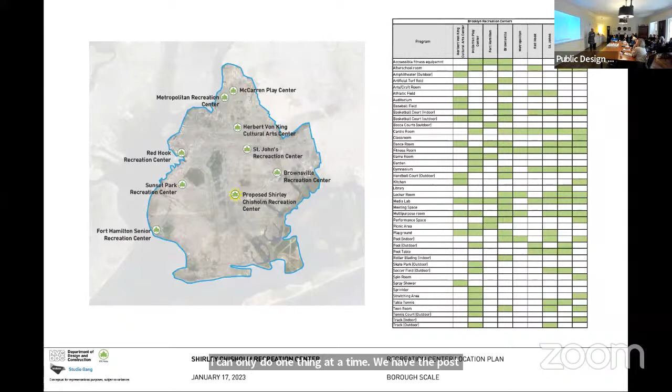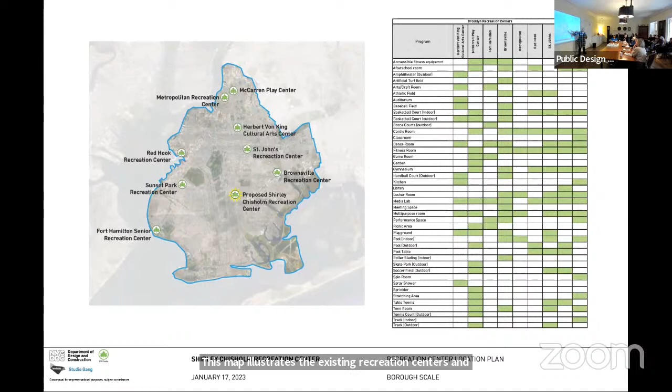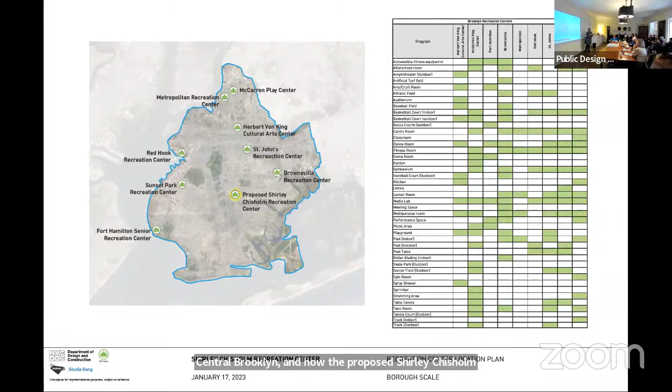This is an amazingly important project for Central Brooklyn. This map illustrates the existing recreation centers and the sort of recreation center desert that we have in Central Brooklyn, and how the proposed Shirley Chisholm Recreation Center will be a major magnet for community health, recreation, wellness, equity, diversity, inclusion, all of the goals that we want to meet with this project.

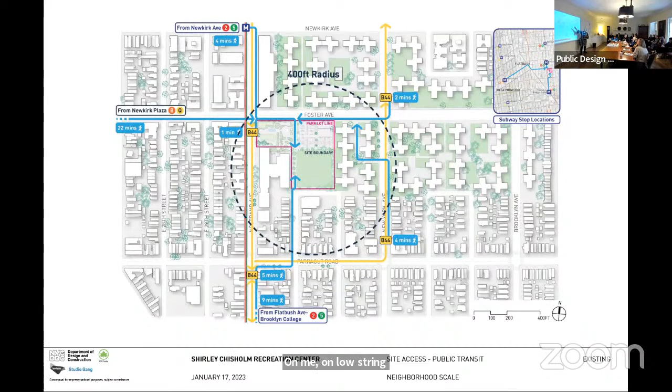It is situated centrally adjacent to what used to be known as the Vanderveer, now the Flatbush Gardens, or a site adjacent to a public school on Nostrand Avenue, which is a major thoroughfare on Foster. And already you can see the influence that will have on the immediate community and the use of open space there.

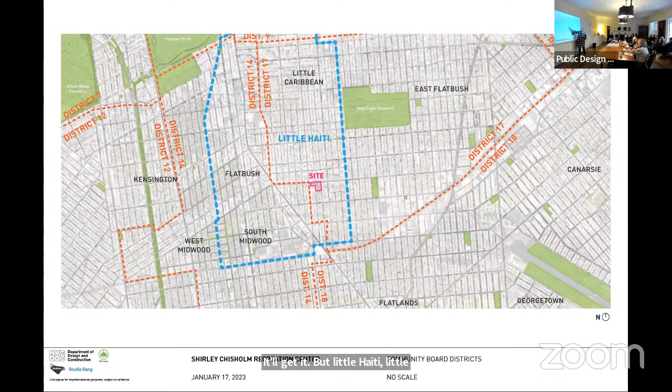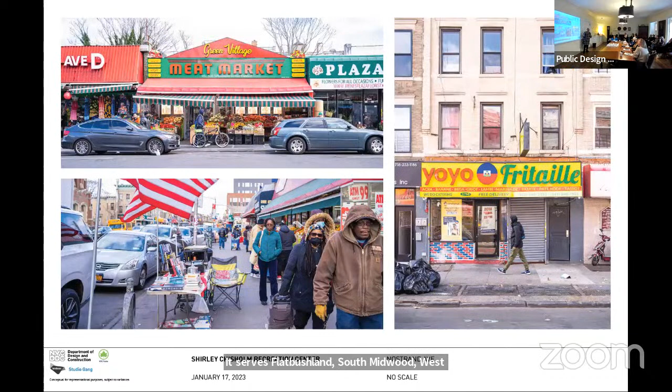It abuts Little Haiti, Little Caribbean. It serves Flatbush, Flatlands, South Midwood, West Midwood, East Flatbush. And within a rich community, an active, vibrant community, it also proposes to expand on that community life. A community that is, in fact, reinventing itself as we speak.

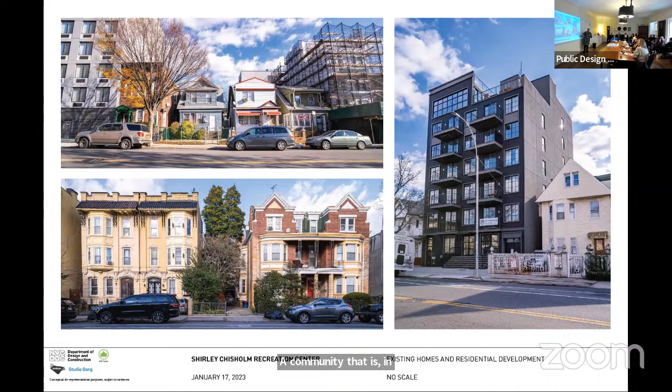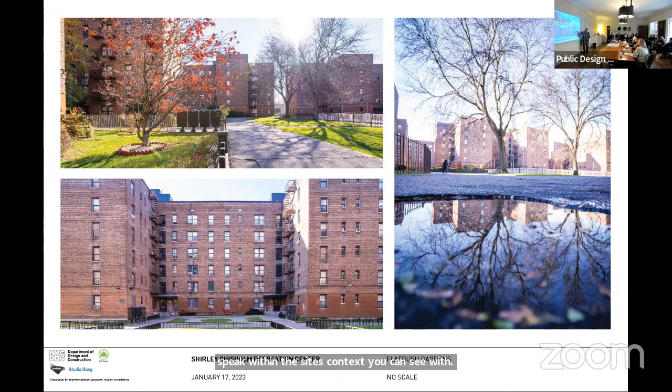Within the site's context, you can see within the Foster houses, the immediate context of the site, its openness, its flatness, its relative embrace with the existing architecture. And within the existing Nostrand playground, you can see how a former baseball and probably mini soccer field can be reimagined for a structure that completes this urban design.

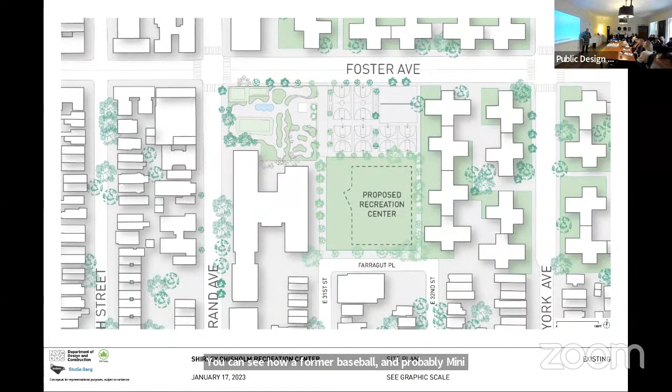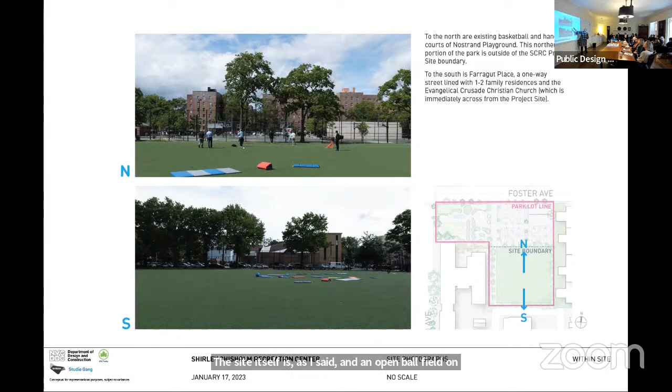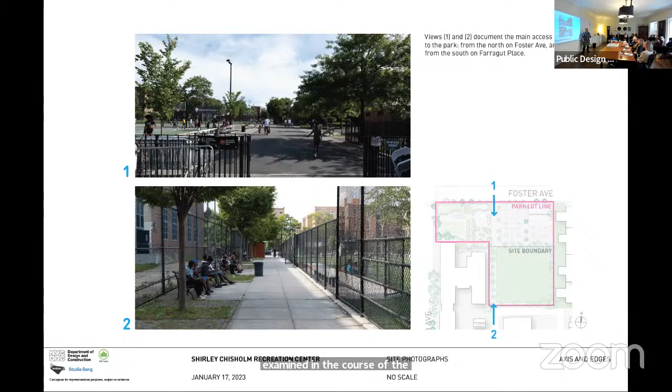The site itself is, as I said, an open ball field on a relatively flat site with clear sight lines through, fronting the school. One of its significant features that will be examined in the course of the design is actually the amount of enclosure, including fences everywhere on the site. Again, even with its adjacent neighboring, how the boundaries are defined are really critical to this project.

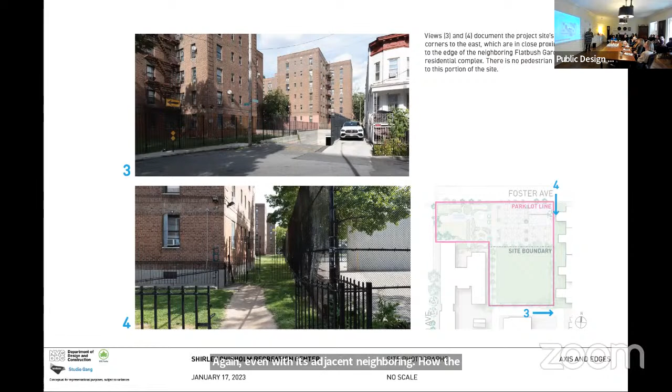We wanted to make sure that in delivering this project, that we weren't paying lip service to Shirley Chisholm, but actually making sure that the principles for which she stood and the aims that she had for representing the African-American, Afro-Caribbean community and Caribbean community in Congress and as a presidential candidate, that these were the basis of the principles by which we approached the design.

I think this is working. So, thank you, Elizabeth. My name is Wes Walker, designer of the Studio Gang team. We are architects of the project, a great team, and also very excited to share with you today the concept for the architecture that's situated within the context that Elizabeth just described.

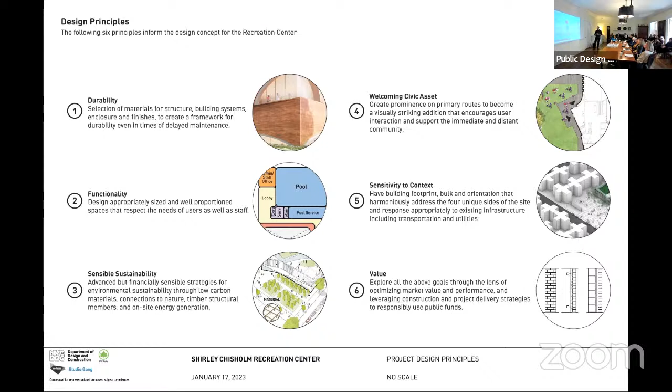So, working on a building in the New York City Park that's really meant to become a kind of welcoming community hub, we laid out a series of principles around durability, functionality, sensible sustainability, and zeroing in on the opportunity for this building to become really a very welcoming civic asset set within this park landscape that's able to negotiate a varied context of housing, of school adjacent, of the park itself, and the different characters of the streets adjacent, and looking for the ways that we can design this to be assembled and constructed in a way that brings the best value to the public we're going to serve.

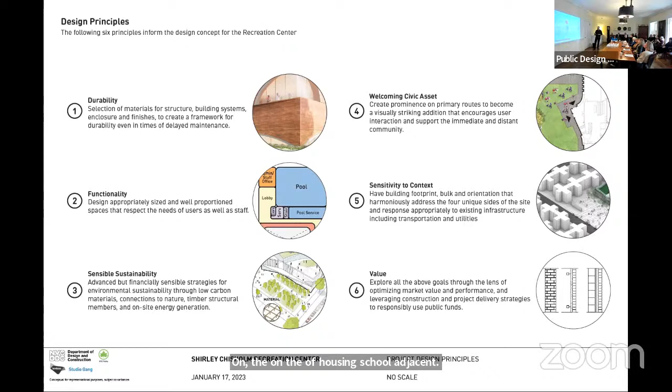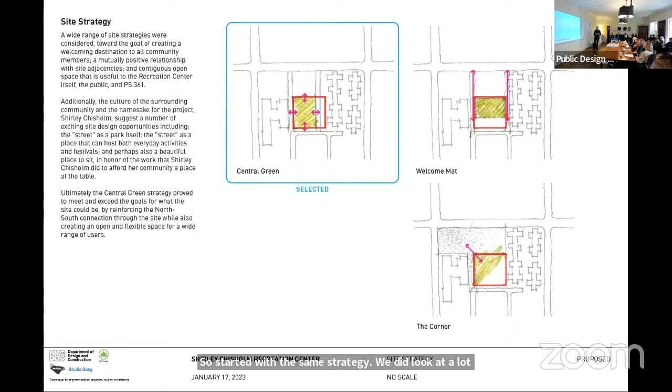Starting with the site strategy, we looked at a lot of different footprint approaches and ways of situating this building in the park. A big question is what's the front of this building?

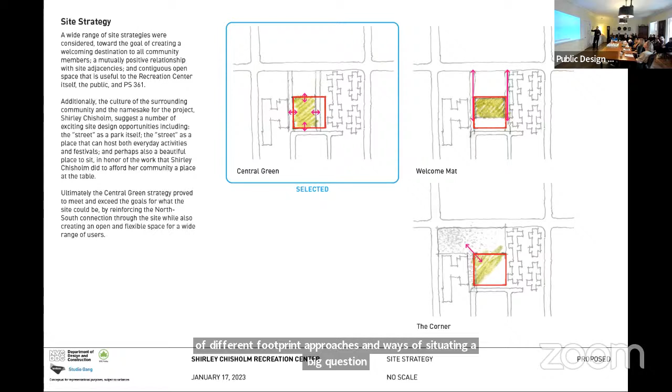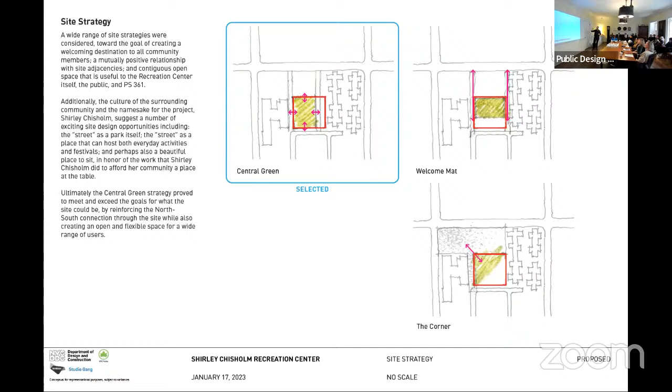It's a mid-block site situated within this park. These different sketches from early in the process look at which way the building should address as its primary front. We came to this central green notion where the building could face all of these directions with some manipulations to the form.

Programmatically, we looked at L shapes and a courtyard building, but we landed on getting the most compact footprint possible, because that preserves as much parkland as we can, and the sense of porosity and openness to the block, which is key for inviting public space and also for security reasons with sightlines.

The program is organized around the two primary spaces of the building, the large pool space and a large gym space. Those are essentially side by side with a spine of support programs in the center that allow for easy access and use of those primary spaces.

The gym is sunken one story below, same level as the tunnel and support space beyond the pool. That's a double height space. On level 1, ground level, we have the track above the gym. The track is at ground level, and the pool is at ground level, which is also a double height space.

Moving upstairs, fitness programs are concentrated on level 2: strength, cardio, spin, locker rooms, and the dance area, adjacent to the upper portion of the pool. On top of the building, we have educational programs largely geared toward youth, giving them secure outdoor space where they can take more ownership of it.

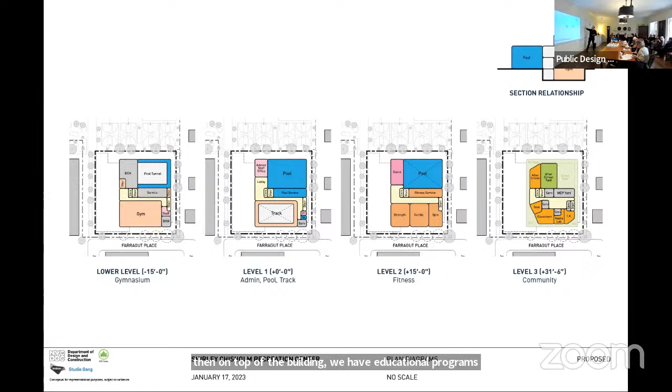Here's a cartoony section diagram of how this works. The gym double height sits one floor below, and the pool double height sits up above. Level 3 is a partial level.

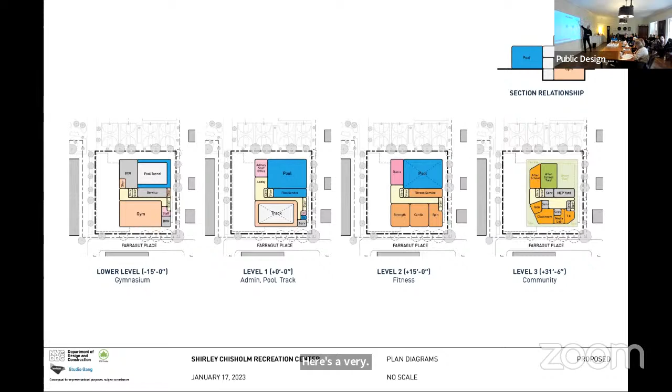These are program diagrams just rehashing what I just said, so I'll move through these quickly.

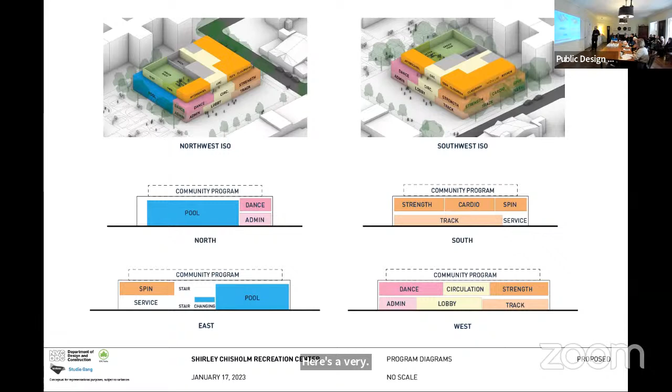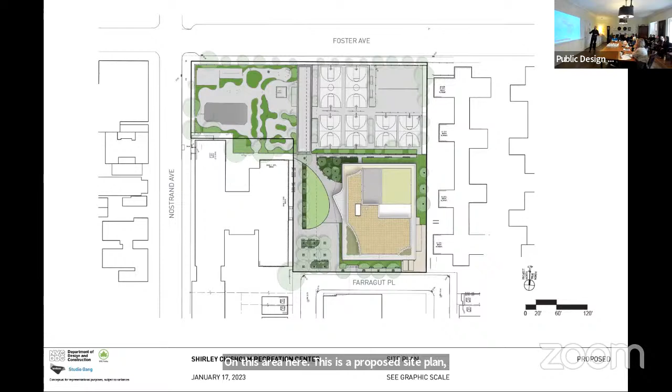I'll hand it back to Elizabeth to describe more about the landscape design. Just a quick introduction to the site plan. Our building is compactly situated on this turf area, and this is a proposed site plan and roof line survey, which we'll come back to in more detail.

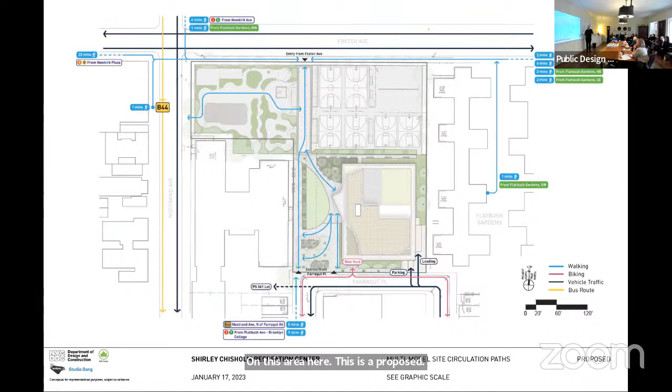Circulation key through the block. Again, this building addresses multiple fronts, so this move in plan peels out the entry so folks can see it from both the south area, where we have vehicular drop-offs, bike rack, and pedestrian access, and also from the north side from Foster Avenue.

We anticipate more folks coming from the north on foot. Most transit connections come from the north, as well as all the activity from the playground and sports area. So the building plan form works to address those two approaches.

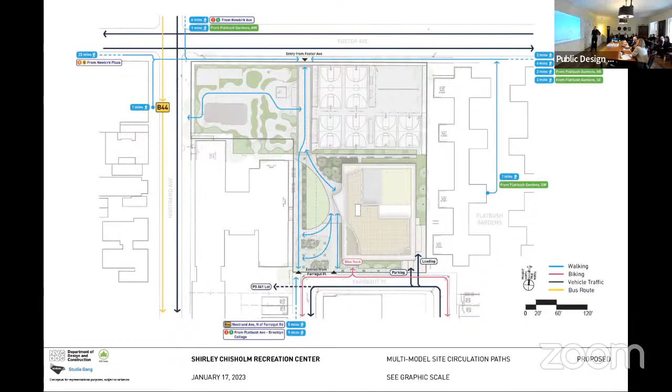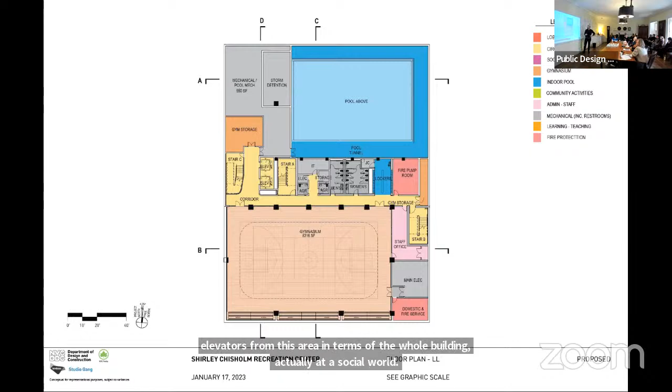We feel like this is a very user-friendly building in the sense that it's quite simple to navigate, but there's a lot happening inside of it.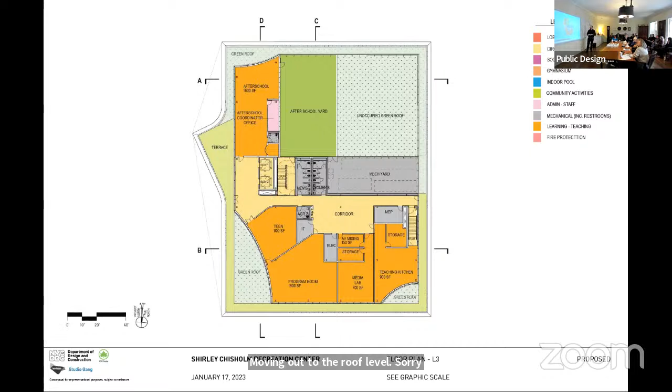Moving up to the roof level, the third level. This is where we have spaces for a teaching kitchen, media, and programming for teens and younger kids, providing a secure roof space for youth that's safely enclosed within a fence that still allows some transparency and views out.

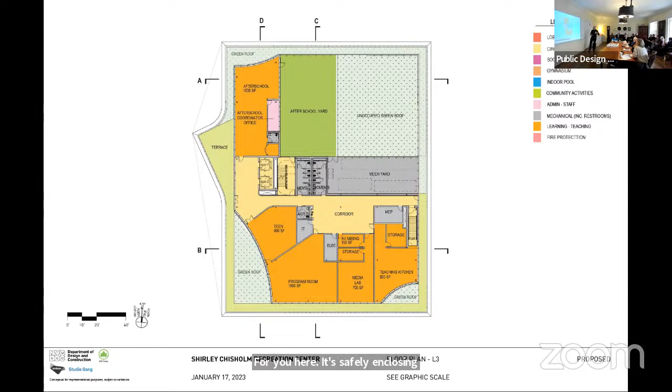This whole level is set back from the edges, with a setback and slightly different materiality to give the building a sense of lower proportion, which we felt was more appropriate for connecting it to the scale of its size. The green roof on top meets the environmental requirements for the project and helps a lot with our water management strategy.

And I'll hand it back to Elizabeth now to discuss. We're in the process of advancing the site development concept in such a way that the original parti and ideas are melding with New York City Park standards, so there are aspects of the design that are in progress.

I'll start with this lower corner. In recent updates, we're studying how use of the service court can be addressed so that we can preserve the full line of existing trees here and maintain the buffer with the residents.

The area along Farragut Place is being refined so that there's more of a defined drop-off. We have fire access challenges, and we're looking to make the site more efficient so that we can consolidate areas of impermeability and permeability to better address landscape needs, planting needs, and stormwater management needs. So there will be an anticipated change within this area.

However, the main program elements we have here are going to be further refined. We're in discussion with Parks about creating more of a direct entry and link to the school, and how this changes the configuration, maintaining the throughput all the way from Foster down to Farragut.

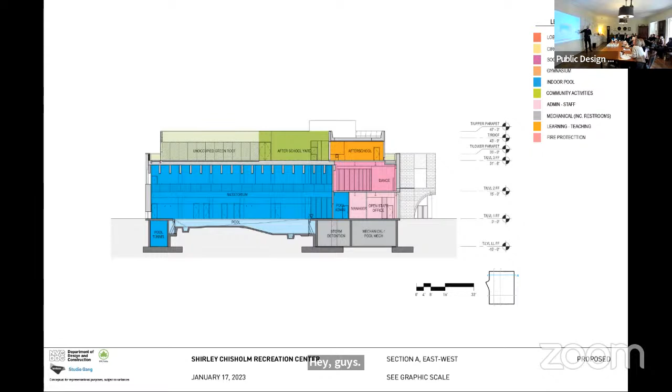I think we'll wrap up quickly here. I'll fly through these sections. This is a section cut through the pool. You can see how the pool is interacting with the below-grade excavation and basement spaces, and these nice sculptural beams spanning across the pool.

Then coming through the gymnasium, where we can see the sunken gymnasium with the running track above it and provision for the beams as well as the basketball and ceiling-mounted elements, cardio strength above.

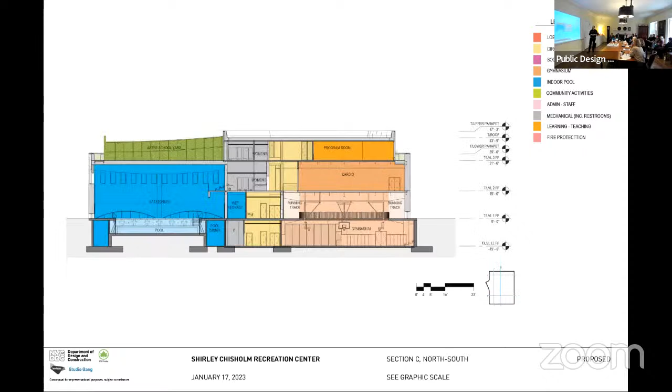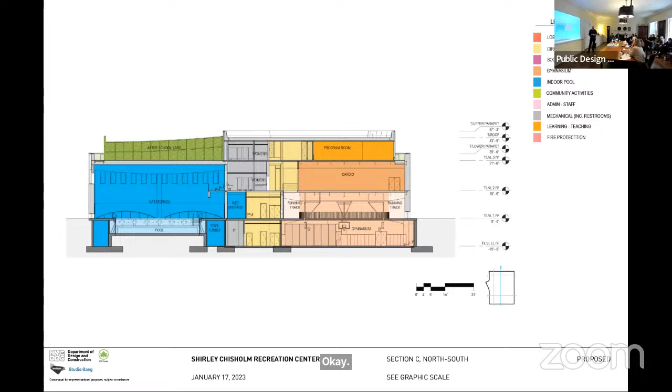Here we're cutting through both the pool and the gymnasium, and you can see the after-school space is set back on top of the building. So we have a building that feels like a two-story building, appears like a two-story building from many views, but it's actually three stories.

Let's see, we're cutting through here - a north-south plane just past the east facade, or the west facade, of the building. And a few notes about our material approach and fenestration approach to the building.

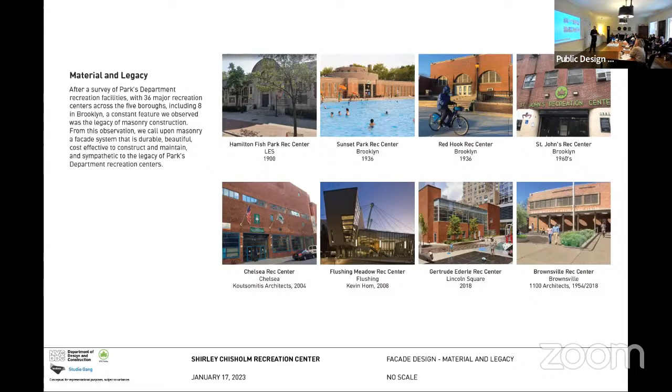So thinking through ways to create openings and different types of windows in this building that are really related to the human body and the different movements facilitated by the programs in this building.

Thinking about lower windows that provide sightlines for folks who are swimming in the pool, and windows related to different heights in a room that correspond to the different heights and elements of the given body.

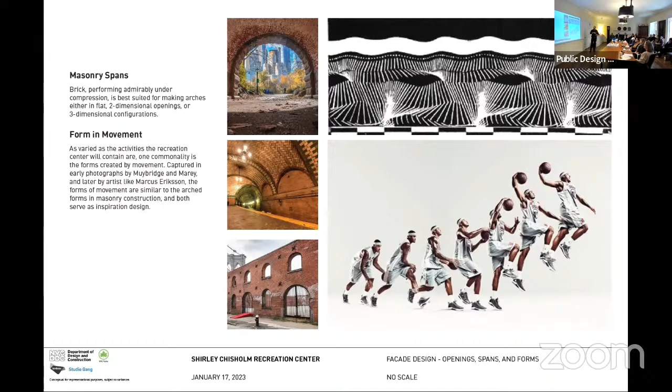So as we move space by space in the building, we started to think about using this vocabulary of masonry arching to establish these different window types, in addition to a kind of rhythm of more vertically oriented windows that create an interesting pattern or staccato texture around the building. You'll see these different window types playing together in some of the elevations here.

We have these lower forward arch windows, and we have these taller arch windows at the entry that form corners, which are really important elements of the building, addressing its surroundings. These are happening on important corners for signaling important approaches.

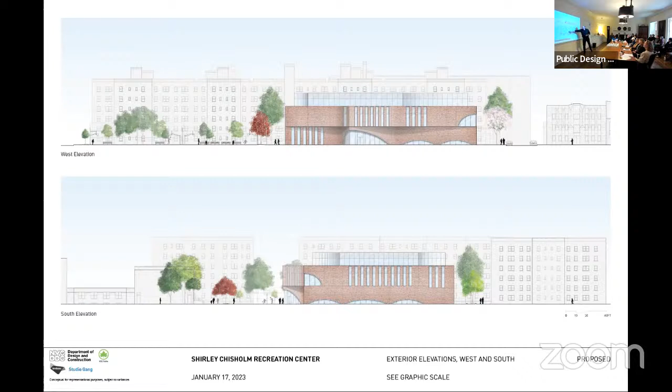These tall strip windows include a spandrel panel at the top. There was a question about that, so the visible window portion is here. We're working on the detail, but some sort of spandrel panel will cover the floor deck while still giving the full vertical expression of the window, which we think is quite beautiful with nice visibility and proportion. Then on level 3, there's a less heavy, more glassy expression at the top of the building.

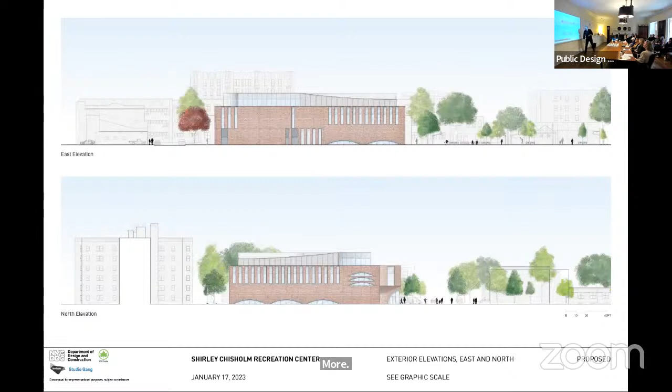These three windows here are a special moment in the dance studio, where we were interested in giving openings at different heights as the dancers would be moving inside.

Here you can see the general palette. We have primarily brick, which we're imagining would be integrated with a precast panel system, so brick-based precast — a very efficient and materially efficient and schedule efficient way of constructing a building on the site in the city.

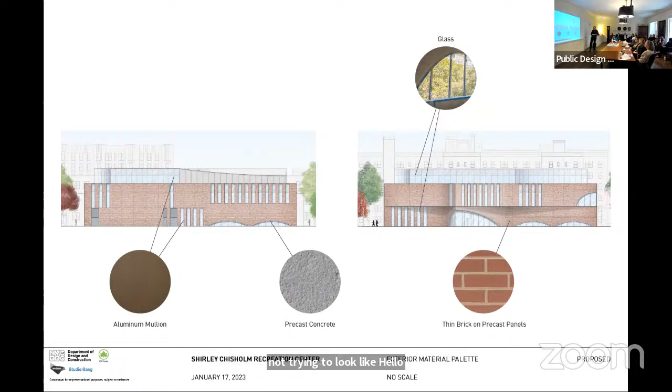Glass glazing and an aluminum framing system. In certain moments we're able to expose the precast, either as lining around the arches or as coping at the top of the facade, so the construction system is expressed and made visible. It's not trying to look like a load-bearing building — it's not that, but it is a more contemporary way of placing brick on the building, allowing us to do all these different types of things.

Finishing with a set of renderings here. This is what I was mentioning with the kind of visible precast edges that we're thinking about. The building presents a lot of variety, but the forms are basically all related to each other in groups of arches or vertical strips.

So we really tried to calibrate the size and position of the openings to negotiate that back and forth between the need for transparency, lightness, and an inviting sense, with the need for security. Where we're able to have a bit more of that openness, we're providing it.

So this is a view from Farragut — the southern approach to the building. This is more of an elevational view that you would see walking on the path adjacent to the school. Across that lawn that Elizabeth was describing, we're providing a shade element, this blade, that runs right along the floor plate of level 2.

And then this is the approach from the north, where the cut of the building here is highlighting the entrance vestibule. You can see how the forms of the landscape plan and the ground plane interact with the building vertically in a really nice way.

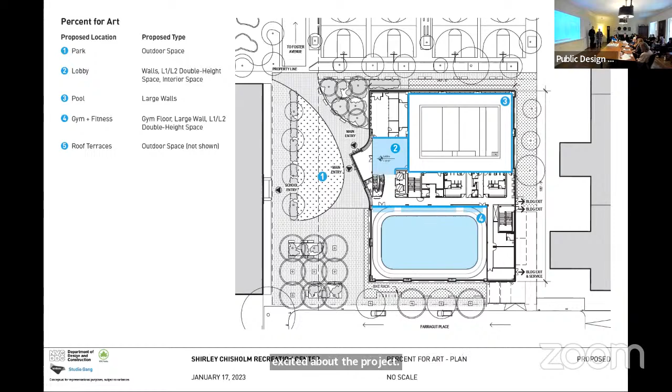I would like you to continue to do that. Is there a way for there to be more of a walkway, or is that specifically meant to be a buffer space so that people can't directly go into it? Or is it a type of something else?

We are studying ways to make the connection direct. And with that also, I would say isolating this line of trees so that this green space is separated by a second path.

We have some concerns about how and whether the school property will actually be secured. The questions haven't been fully answered yet. Right now the school perimeter is very porous, so I'm not sure that an additional fence is necessary. I work with SCA properties, and we usually do have to have that, but in this instance, this is not here.

Just for historical context, this was a demapped street, and this was actually the entrance to the school. So in a way, fencing it is sort of like a defensive gesture that we don't necessarily want to introduce.

But what we're looking at, because this area has to be developed also for fire egress, and because we're now studying consolidating all of the impermeable area over a utility easement, a DEP easement, to expand permeability here, which might be planting, we are creating a throughput here. And the path, and probably reconfiguring the green space, incorporating the trees, because we're also looking at stormwater SMP opportunities using that existing line of trees.

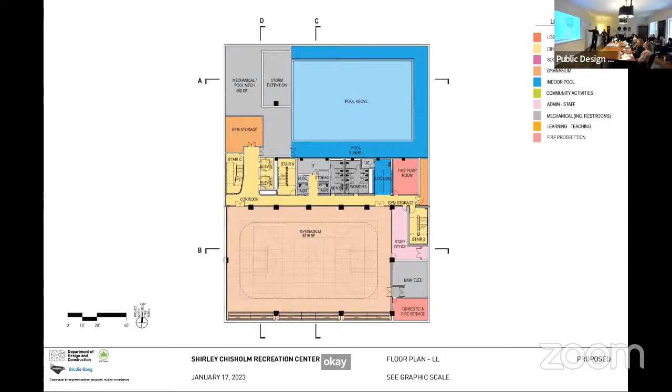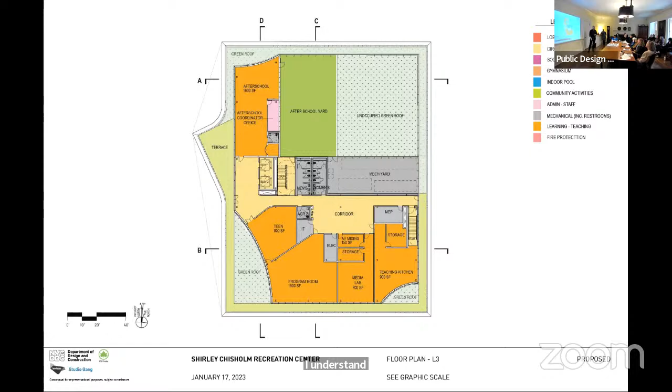And then moving up to level 2, and straight above, we have another set of changing rooms, locker rooms and restrooms. There's some more levels as well. So they're distributed throughout the building, but the ones at this level are specifically designed for folks to come in and leave wet, and the other direction come out and leave dry. They're integrated with lockers and shower facilities, designed with wet areas and dry areas, keeping that separation.

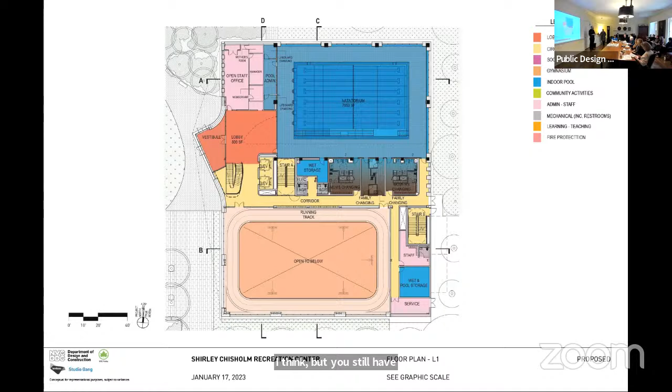I know this can be uncertain, but you have responded to a number of the comments made earlier, and they are quite good, I think. But you still have indicated that you are working on a number of important questions, including seating and more, and then on the question of the percent for art, there seem to be quite a few locations potentially available.

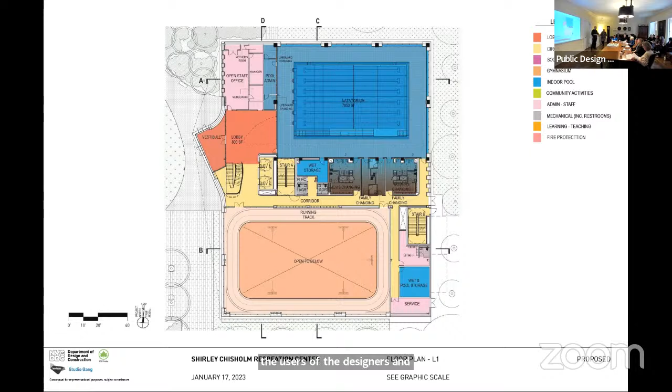When does that occur? And is there—that's my second question—a collaboration among the users, the designers, and percent for art? Is there money? When does all of that happen, and how is that integrated in the completion of the design for the building and the entrances and exits that you are now, I hope, completing?

So it's two different things, but related. You are very responsive, and you have more to do. You've said that, and it's a big and terrific project—just a wonderful project that even in my late time, I began to read it last night and felt this is terrific.

Do you have the funding? Can you be doing this? Is there integration of all of the people who are designing? Is it going to be 3 years to your knowledge, or 2? And then secondly, the place of percent for art and what seems to be many different proposals for art, and who would be involved in that?

Okay, so thank you. A couple questions there, and I might ask for some assistance from folks at DDC if possible. But generally, we are here today with a conceptual submission, and we've identified a wide swath of opportunities for integrating art into the building, and we'll narrow those down as we move through the process and really think about the high impact, high potential spots, and I'll be part of our next presentation for you.

Okay, but pass it over to Daphne if you want to say that. Thank you. Sure, I just like that in case we'll use a microphone.

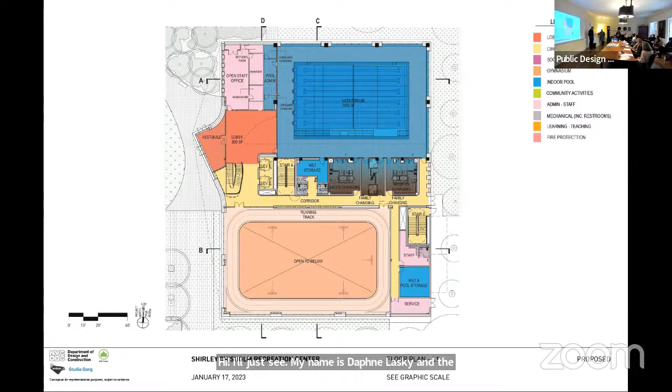I'm the project manager with DDC. The percent for art orientation with the artists is scheduled for Thursday this week. We have 4 to 6 finalists from DCLA, and I think we're all looking forward to seeing how they react to the different options for locations and getting into that process with them.

Thank you. And then a question about schedule, design schedule. We're progressing through the design and are very comfortable to be able to address these comments and advance the design appropriately with the schedule we have. I don't remember off the top of my head exactly what the milestone dates are, but we're moving quickly, and we're carving out enough time in this design phase to address all these things quickly. I think we'll be able to do that at some level for the next phase. Hopefully that's specific enough. Thank you.

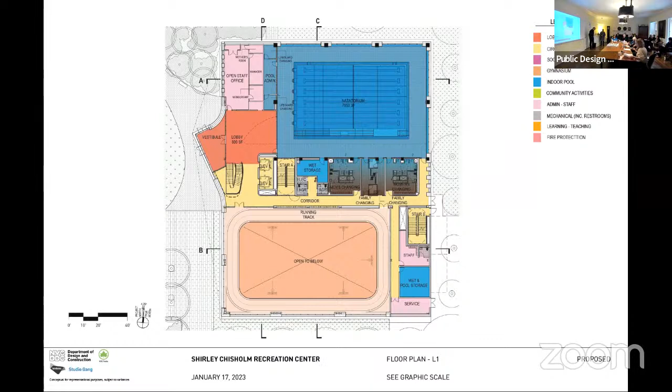Any other questions? I think it is important for you guys to consider the art impact in the space, whether it's tile work, work on the floor, on the exterior, lighting opportunities like electric light, or permanent physical sculptures in the exterior of the plan. I'm glad that there aren't a lot of fences or fencing involved, because I think that was a concern in terms of making it central and approachable from all spaces.

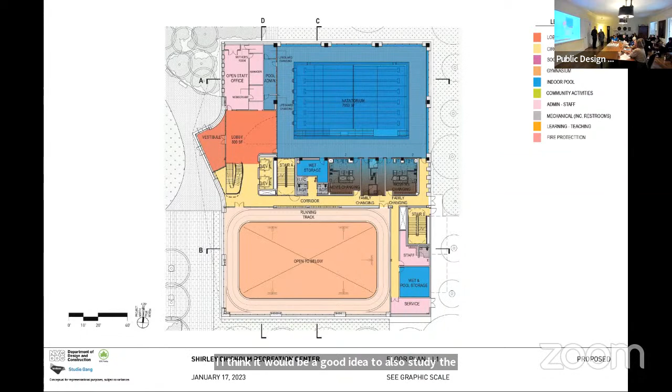I think it would be a good idea to also study the lighting and what the lighting effects are at night, in terms of the light usage for the pool and all these other areas, what that would look like from the outside, from all surrounding entrance spaces. It would also be good to see what it looks like from different housing areas—what is the point of view of your neighbors and community, how they would know what this facility is and whether it is approachable. I think that would really impact the community and make them feel like this is for them.

On the lighting topic, one thing that I think is going to be particularly nice here is the building's light will illuminate the ground. So these windows have a function both outside in and inside out. These illuminated spaces are going to be illuminating plant material on the ground plane and on the whole exterior building, which is quite different than a lot of these masonry buildings you see, where the openings happen maybe until 6, 7, 8 feet above your head, typically in the fitness space. So that's one idea we're looking at.

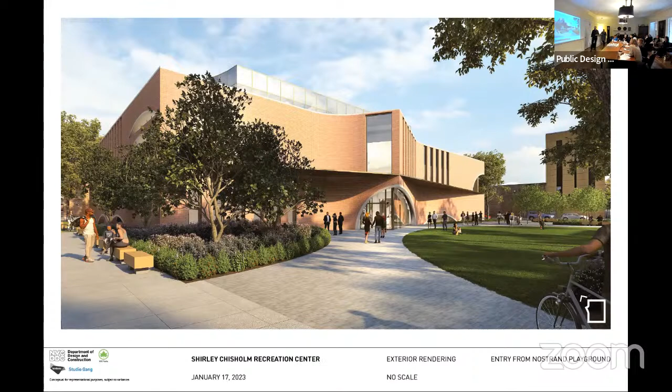Two of our commissioners couldn't be here today and they relayed their comments. Deborah requested that the team clarify, site planning wise, how the congestion will be handled at the building entrance, and how the loading area will be screened, and how Farragut Place can be further enhanced as the primary vehicular drop-off location.

Elizabeth spoke to ongoing developments around the loading area and some additional trees that will be shown there. I agree the curvatures around the entry and plan are real tight right now, so we'll optimize that to make sure there's generous space in the ground where that entry is. That was a big comment, so that will be part of our next submission.

Thank you, and there was a second part to that. She asked what the hours of operation would be for the adjacent park, and how the building is accessed when the park is closed. The park is open until 9 p.m., 6 a.m. to 9 p.m. Sorry, what was the second one? The building hours, how the building would be accessed when the park is closed. Or would it be accessed at all, because the building is closed too? Yes.

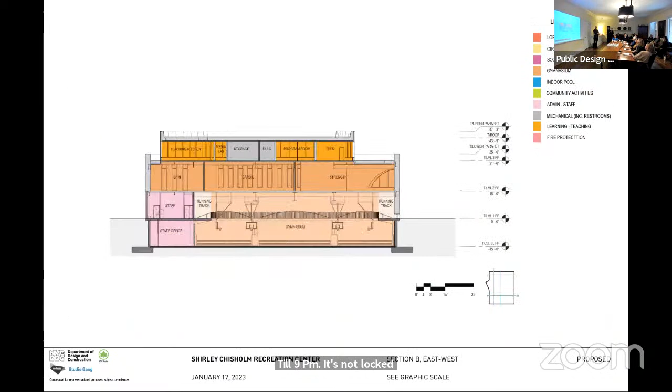Sure, again, I'm not necessarily the public manager of parks. The existing park is operated from 6 a.m. till 9 p.m. It's not locked up. So that existing closed street which connects Farragut Place to Foster Avenue is open, so it is possible to circulate through that. The hours of the park are posted at all entrances, and they will be updated once we work out the operational hours of the new center. Once we have done that, we will update the signage around the park to make that evident.

And in the event that there is something happening at the center that goes past 9 p.m., you will be able to circulate from the building out through the site, to the north to Foster Avenue, or to the south to Farragut Place, because those entrances will never be locked.

As you continue to explore wayfinding and site navigation for residents and the community at large, Deborah also asked about fence heights and types. We owe you a fence diagram in the next submission, so we'll provide that. We're still hashing that out, but the goal is to really maximize porosity and minimize the fence elements, to make this building feel like it's sitting in a public space as opposed to carved out of the park. We're excited about how this project can improve the welfare of the park and make the whole site feel much more accessible.

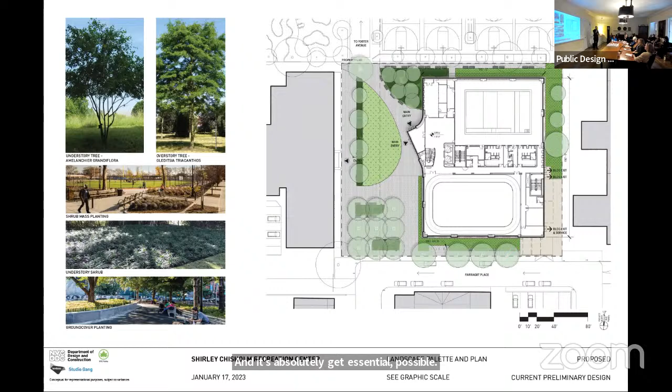With regards to the specific question about ventilation, that's on a space by space basis. Spaces like the gallery have very specific ventilation needs, not necessarily aligned with operable vents. But for other rooms that are more human-scale, like a teaching kitchen or a study room, we will be providing operable vents, often situated in strip windows that are a manageable scale to open. So the building will absolutely have ventilation where we can provide it, when it's possible to do so without undermining the energy strategy we've been working on.

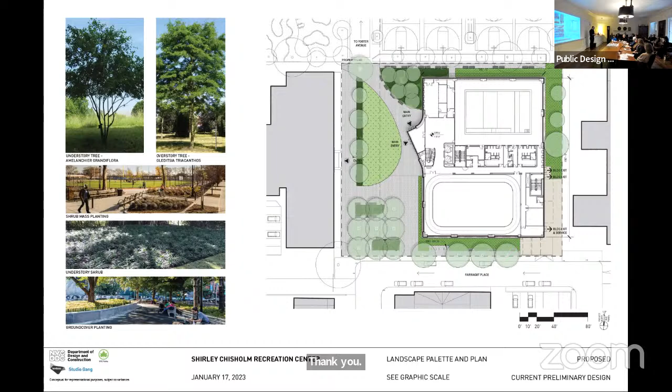Thank you, that is all. Thank you, thanks very much. Great, appreciate it.